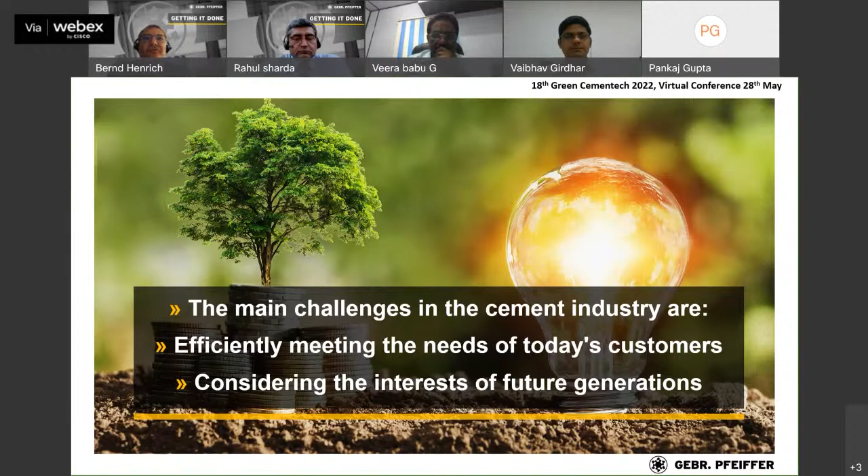It makes sense to look into this in detail. As you know, the efficiency of a plant, the efficiency of the grinding systems, is important, because as known in the literature and from many publications, the power consumption in cement production is

significantly driven by the grinding process. We learned already today and yesterday about net zero clinker production, which means waste heat recovery might be able to get electrical energy for the kiln itself, so to have a zero clinker production. But the energy required in the grinding of the cement raw material, as well as the energy required in the grinding of the cement, is electrical energy which needs to be optimized to pave the way toward low CO2 emission or even net zero CO2 emission. I would like to focus on these grinding processes and how to optimize them.

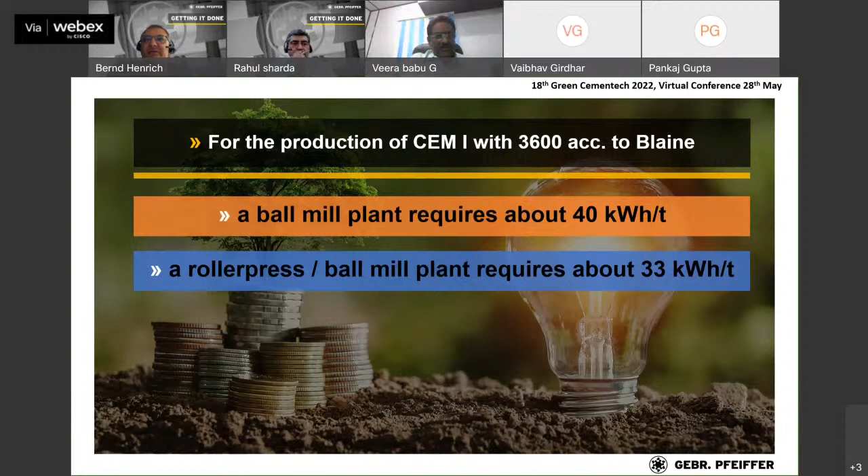Optimization using combi grinding systems, with roller presses in front of the ball mill, gives a significant reduction in electrical energy. The next step is the vertical roller mill, a state-of-the-art efficient grinding system, where we can come down from roughly 40 kilowatt hours per ton to 27 kilowatt hours per ton for OPC cement grinding.

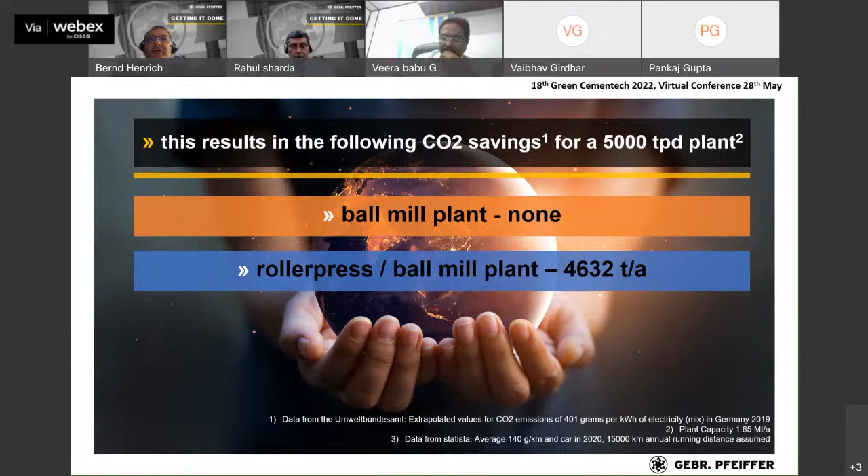And what does it mean in view of CO2 emission? Let's take an example of a 5,000 tons per day plant, which for India would be a small plant, but in the rest of the world is quite a normal size grinding unit. With a ball mill system, logically there is no saving at all. By using combi grinding with roller press and ball mill systems, about 4,600 tons per annum of CO2 could be saved. With the vertical roller mill, that is about 8,600 tons of CO2.

Just to get an impression of what 8,600 tons per annum means, that is roughly equivalent to 4,100 cars, considering a yearly driving range of about 15,000 kilometers, as we are Europeans. So just to see how it works out: when grinding efficiency can be improved, that gives a significant positive effect to the whole environmental situation, not only for the cement industry but also compared to other optimization steps.

So what kind of optimization can Gebrüder Pfeiffer do in this respect? For you, as the cement industry, we are first of all talking about the reduction of the clinker factor. Reduction of the clinker factor is a main step.

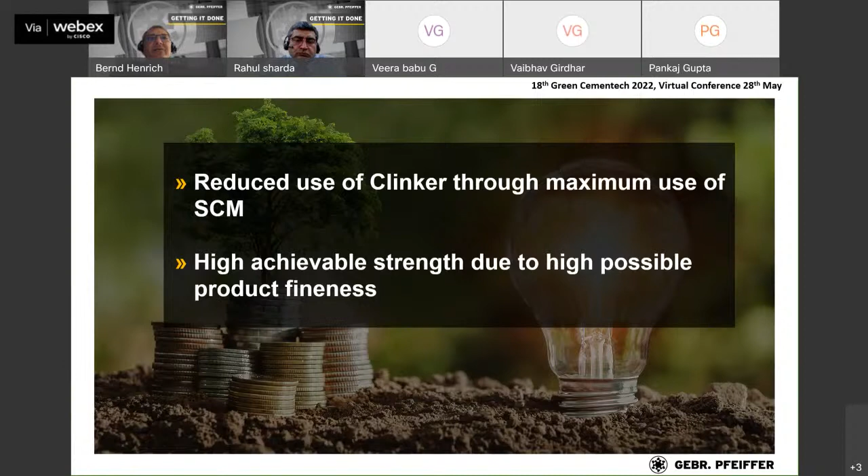What have we done in this view? The improving of pressure loss and optimization of the gas flow is a major step which goes into CO2 reduction, which means in the past 1.5, 2 years, we have newly developed a classifier or optimized further the classifier, the VR and the VC classifier types on the vertical roller mill.

We have made optimization on the nozzle ring, on the gas flow in the lower part of the mill, the gas flow in the classifier, and also the gas flow going to the system, then to the dust collecting system. That all has been done with CFD analysis, and not only CFD gas flow. No, two-phase simulation, powder to be considered in the gas flow.

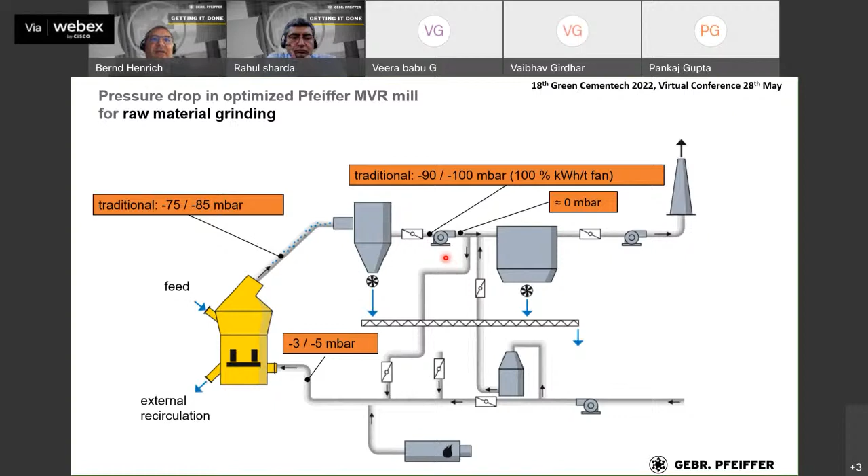And these steps lead to optimization in plants, for example, in raw material, where the traditional vertical roller mill had about a delta P of 75 to 85 millibar, and we had suction pressure at the fan of a raw material grinding system of about 100 millibar. We could improve this significantly. We could reduce by 15 to 25% the power absorption of the fan.

So this goes mainly in the gas flow related issues, and this power saving at the fan gives you about 1.5 to 2 kilowatt hour per ton on the total plant power saving. And this total power saving means saving of cost and saving of CO2 emission finally. So it comes into, let's say, less production cost, and less electrical energy means also less CO2 emission.

And by the way, just coming back to this picture, here you can see an MVR mill for raw material grinding, and you can see the easy and small arrangement. There is a simple steel construction for the feeding of the material. There's no building, so we are not only talking optimization in the operation cost, also the investment cost. With an MVR vertical roller mill, you don't need a building, you don't need an overhead crane.

So investment cost compared when you see a combi grinding system or a roller press building for finish grinding. With our vertical roller mills, you can save a lot of these costs, which are not directly machine costs, but which have to be considered in the total investment view.

That gives you roughly 1 kilowatt hour per ton, 1 unit saving in the cement grinding. Compared to the overall power consumption, it is maybe a small step, but 1 kilowatt hour per ton, again, this is a saving effect. And that means the vertical roller mill grinding systems become even more efficient compared to the combi grinding or the finish grinding in other grinding systems. And it provides you saving of electrical energy, saving of costs, and finally, reducing the CO2 footprint of the complete plant.

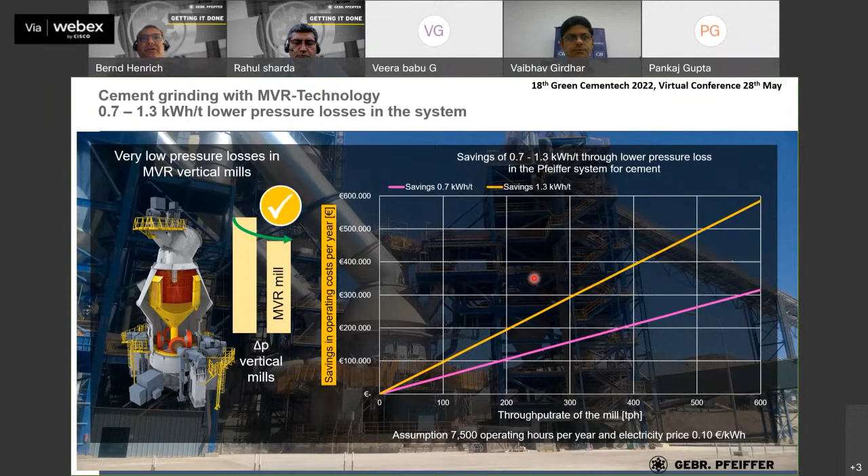Another important point, as Rahul has already explained, use of latest technologies, meaning, for example, Industry 4.0, artificial intelligence. Yes, sure, Gebrüder Pfeiffer is on this way also. We have implemented several testings, and we have a better version using artificial intelligence. An operator knows his plant and his mill, but people are thinking in a certain direction and are driven by the history, the experience.

And if you have 4 or 5 variables, you might change one of them and look for a little bit of influence. The beauty of using artificial intelligence rules is that once we get the freedom to vary the parameters, there could be operation conditions related to the fan flow, related to the speed of the grinding table when you have a variable speed drive, related to the feed rate and things, which nobody has thought about.

And we were able in some pilot installations, for example at a cement producer in Germany, to reduce the specific power consumption by the use of artificial intelligence by more than 15%. And in Sweden, in another plant, we were able to reduce with artificial intelligence the power consumption, but also, what is quite important, optimize the fuel consumption. There in this plant, the beta version was used for the hot gas generator.

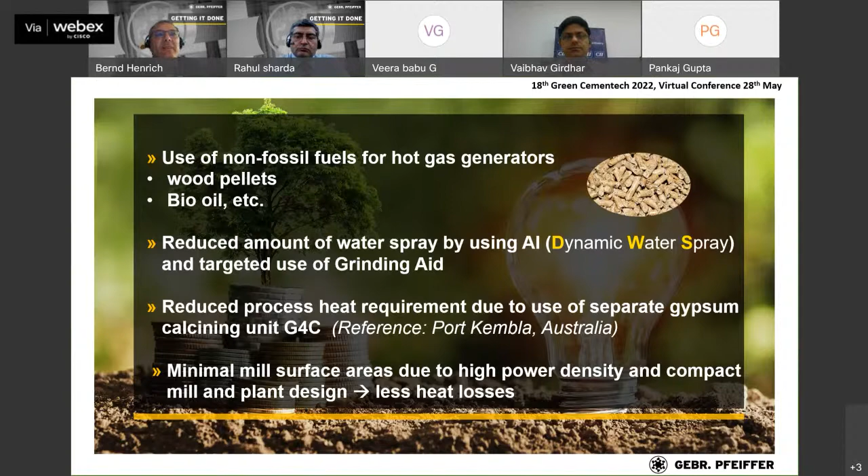Also reducing water injection. The dynamic water spray system is a tool which allows us to overcome the laziness of operators. In the plant, we all know that it's easy to spray some water on a vertical roller mill, whether you require it or not; it's the easiest way to do it from the control room. But there are tools which help us overcome the operator, because he never reduces the water spray later on, and everybody complains about the material quality, the heat requirement, and so on.

So the dynamic water spray system, when it was installed, gave a significant step ahead in reducing the water, because water spray that is not required means increased thermal energy, and that has to be avoided. So there are plenty of steps which allow us as Gebrüder Pfeiffer to improve your operation. We cannot reduce the CO2 emission from the clinker production itself. But we can assist with our systems, with our mills, in optimizing the electrical and thermal energy requirement in the grinding process.

We are also active in the activation of calcined clay. Calcined clay will come up. The reactivity of calcined clay is reported to be even better than that of blast furnace slag. So maybe at a certain time, calcined clay can substitute blast furnace slag as an additive. Calcining means thermal treatment and grinding of the clay. So we have solutions for this.

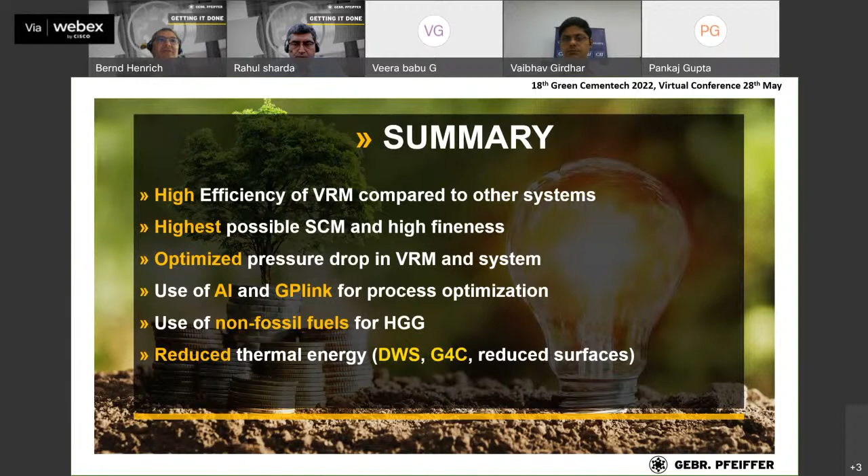Also, we have solutions when we talk about pond ash. Pond ash is stored and is wet, and it has to be transported to the grinding units. So either you transport 20% water on the truck, or you use, for example, Pfeiffer dryers to first reduce the moisture of the pond ash and then have less transportation cost, because in scope 3 CO2 emissions, transportation and so on also has to be looked into. So there are plenty of points where Pfeiffer is prepared to help with optimization. We cannot make cement zero CO2 emitting, but we are on the way to assist you and provide you solutions.

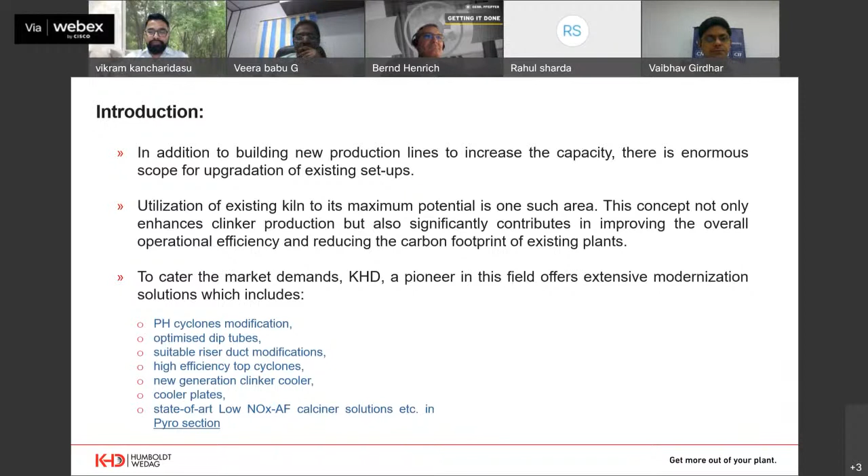And if it's a grate cooler, keeping the existing structure as it is, the complete moving grate can be replaced with the latest grate plates, and state-of-art low NOx alternative fuel calciner, and there are other solutions as well. In grinding, we have the V-separator, static separator replacements for improving the classification, and also the latest generation dynamic separators to improve the productivity and also to reduce the specific power consumption, and also modifications related to ball mill parts and roller press parts in the grinding section we are working on.

Coming to the subject topic here, I'm going to talk about a turnaround study of Kalyanpur Cements, which is the Dalmia Group plant. DCBL, one of the top 5 cement producers in India, has taken over this plant, Kalyanpur Cements, in 2018, and this plant was supplied by KHD in the 80s. And after the takeover, DCBL has approached KHD to do the evaluation for increasing the capacity. So our plant audit team went to the site and did the detailed plant audit to identify the debottlenecking areas.

And we immediately submitted a technical proposal to the customer. And after rounds of discussions, the project has been finalized. And DCBL placed the order on KHD in 2019. And this was a fast track project to execute the complete EP supplies in 7 months.

You see the key data before the modification. The pyroprocess line was operating at 1625 TPD with 42 to 43 millibar pressure drop at preheater outlet, and the temperature for a 5-stage preheater with 370 to 375 degrees. And the raw grinding system, roller press finish mode circuit was there, but of old generation. 120 TPH it was giving at 12% residue on 90 micron.

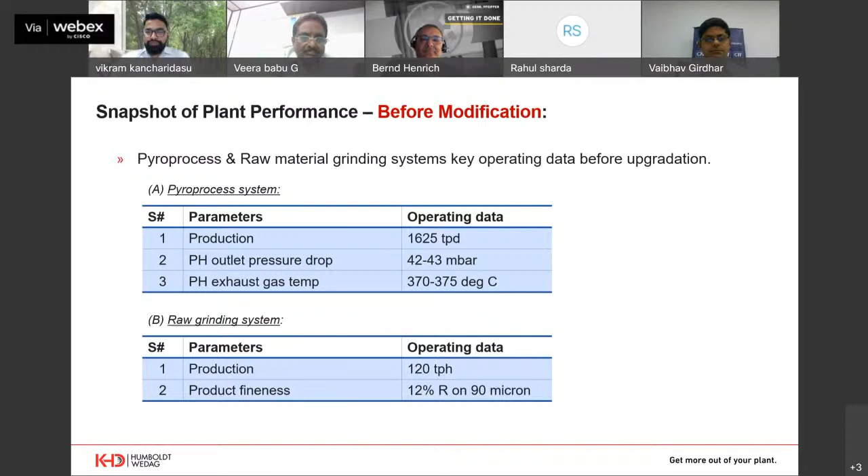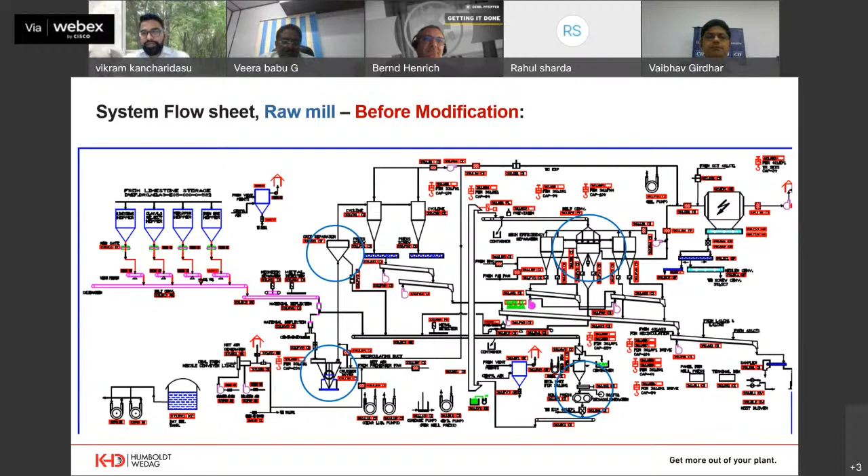And coming to the raw mill section, it is a different circuit from what we are seeing in finish mode in roller press today, because at that time in the 80s there was no V separator. So the drying function was done in a pneumatic hammer mill and also size reduction. From this, the material is lifted to the static separator. From the static separator, the rejects are going to the roller press circuit, and the recirculation material from the roller press circuit going to the dynamic separator, and product collection takes place here and then transported to blending silo. Rejects are back to the roller press circuit. So this is a completely different circuit from what we are seeing today.

Coming to the implementation of the proposed modifications, in the kiln feed section, we have modified the areas and components where the capacity was lower. We have identified what capacity we can guarantee from this kiln and what capacity we can achieve. Based on that, we have estimated the capacity balancing. Through that, we have modified certain equipment, like the extraction gates from the blending silo, the transportation air slides, and also the elevator feeding to the kiln feed bin, and also the kiln feed flow meter system.

In the preheater system, the major modifications include replacement of the earlier generation top stage cyclones with the latest generation twin cyclones of KHD. There are two purposes of replacing this top cyclone. One is to suit the capacity enhancement requirement. The other is to improve the overall collection efficiency of the preheater system, because we were not able to significantly modify the complete cyclones due to building structural layout constraints. But for the top cyclone we had the opportunity, so we replaced it with a better cyclone. We have replaced it with two new cyclones in the top stage, and also an inline calciner.

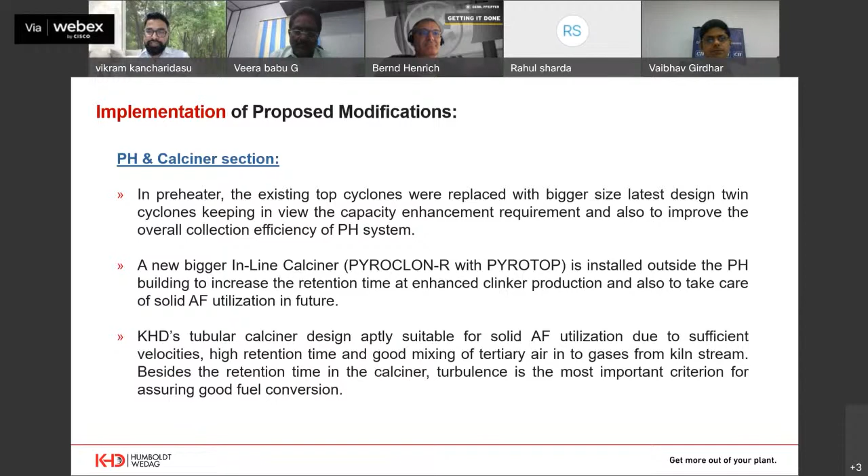Earlier, the plant was operating with a separate line calciner, so we have provided a new inline calciner of bigger diameter completely outside the preheater building. The advantage of this tubular calciner design, as you are already aware, is that it is aptly suitable for solid AF utilization, because the velocities are sufficient for lifting the solid particles. Second, the kiln gases and tertiary air gases mixing takes place in the tubular calciner with the help of the Pyrotop.

This is a unique design in KHD calciners, where we have the Pyrotop on top of the calciner, which takes care of the complete turbulence and mixing effect, because the residual oxygen and the burning particles, meal and fuels, must be mixed well before going into the bottom cyclone. Sometimes we have the residence time, but without turbulence we will not get the required combustion. So with this Pyroclon with Pyrotop design, we have the complete mixing effect, and before reaching the bottom cyclone, we will get complete combustion.

We have also installed a Pyroclon calciner firing system. This is also a patented design of KHD. It's a simple design, but unique, because the meal and fuel are both introduced into the feed box before entering the gas stream. So the pre-mixing already takes place, and the pre-mixed material is uniformly distributed into the gas stream, which gives uniform heat distribution across the calciner.

So it avoids temperature peaks. In old calciner burners, we have seen that the refractory fails too soon because of the high temperature. Because of this uniform heat distribution, this problem will not be there. The other advantage of the Pyrobox is that there is no additional requirement of primary air, which contributes to heat consumption reduction. Apart from this, in the pyro section, we have done some tailor-made modifications, because case to case we have to identify these modifications.

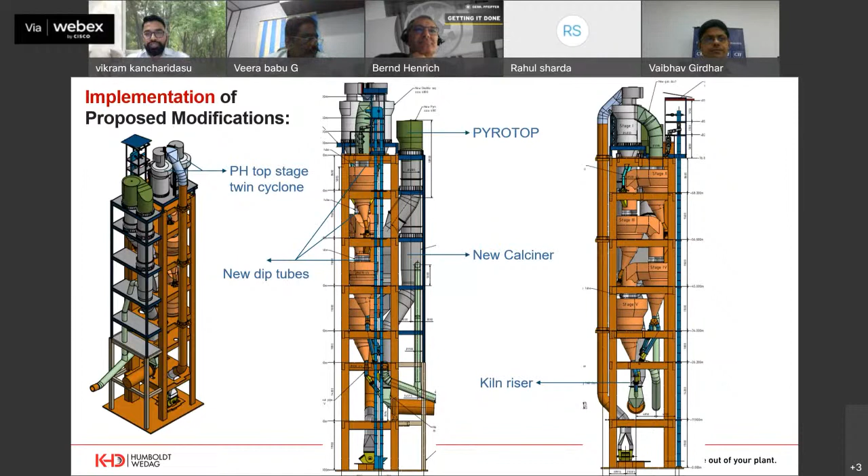and kiln riser section. In the kiln section, we have increased the speed of the kiln from 3.6 to 6 RPM. And the critical components of the kiln for the higher capacity have been checked through the stress matrix analysis. And we found that some of the critical equipment like the kiln shell has to be replaced because it's not suitable. So we have done thorough analysis, given the recommendations, and modified kiln shell of approximately 30 meters.

And coming into the cooler, we have used the outside skeleton and replaced the complete moving grate section of the cooler with the Pyrostep square design latest generation cooler plates. And also to take care of the increased gas volume requirement, baghouse capacity has been enhanced and one new baghouse fan is also installed. Just a schematic flow sheet. You can see the red color pictures here.

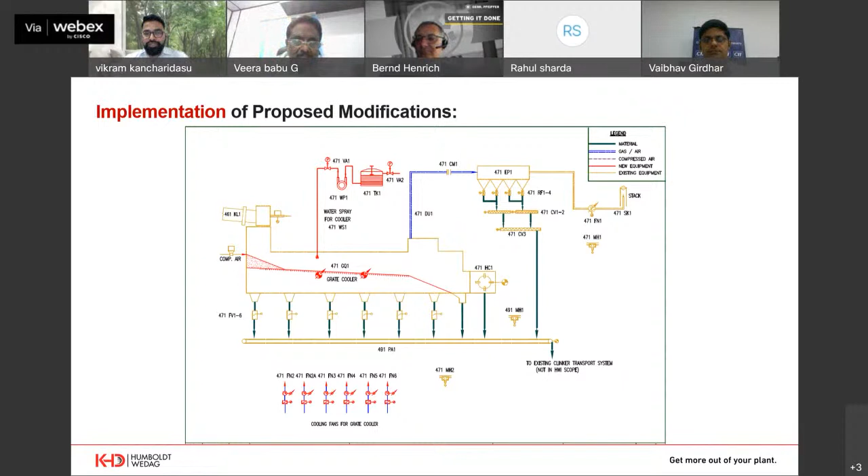The kiln gearbox and motor replaced, partial modification of the kiln hood we have done. And also in this particular case, the existing burner from the group plants has been used with the tip modification, but the swirler blowers were not suitable, so we have replaced the swirler blowers with suitable capacity. In the cooler, as I already explained, the complete moving grate has been replaced, along with a set of new fans, and a water spray system is introduced.

In the fine coal dosing system, the complete existing coal bin has been utilized, and the extraction system has been modified with the Coriolis feeders for both kiln as well as calciner firing. Here you can see in the picture, 2 complete extraction systems are taken independent, one to the kiln burner, the other one to the calciner burner, and both are dedicated, having a transport blower and one common standby blower.

These are the summary of modifications which I have already explained. You can see here the top cyclone replaced with a bigger 4.8 meter dia, and the inline calciner has been installed, suitable for almost 8 seconds retention time. Preheater fan is new, and also in the kiln we have increased the speed to 6 RPM. Motor has been replaced. In the kiln burner only tip modification has been done.

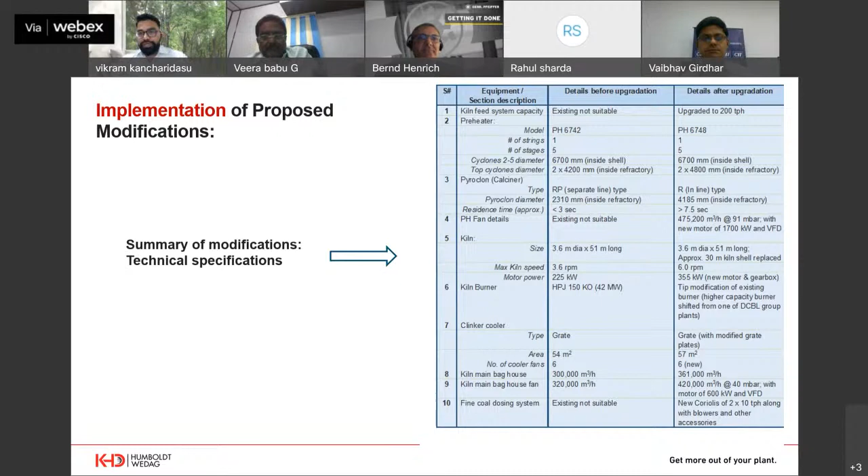In the clinker cooler the complete moving grate has been modified. In the kiln baghouse, the capacity has been enhanced and the kiln baghouse fan is installed. In the fine coal dosing system, new Coriolis of 10 TPH each for kiln burner as well as calciner burner is installed. In the raw grinding section, because on one side we are increasing the capacity of the pyro system, on the other side raw grinding capacity should be suitable for catering that requirement.

So we have seen what are the potentials in the existing roller press system. Being an old design, the speeds were very low, 1.4 meter per second. So we have seen that there is a potential to increase the speed from 1.4 to 1.6 meter per second by changing minor things in the gearbox. So the existing gearbox can be retained. So that we have done. And also the motors were not suitable. Then we have replaced the motors with bigger capacity, 900 kilowatt. RP hydraulics and the roll cock system software, the latest generation, have been upgraded in the existing system.

As I already showed in the flow sheet, the existing system has this pneumatic hammer mill for the drying. Now we have a V separator for the drying purpose as well as for the primary classification purpose. We have installed a V separator, and for the higher capacity, one new dynamic separator is also installed. And these are incorporated in the finish mode circuit with the existing roller press. Two recirculation elevators are installed for V-separator and roller press discharge material handling. And also 2 product collection cyclones and 1 circulating fan are installed.

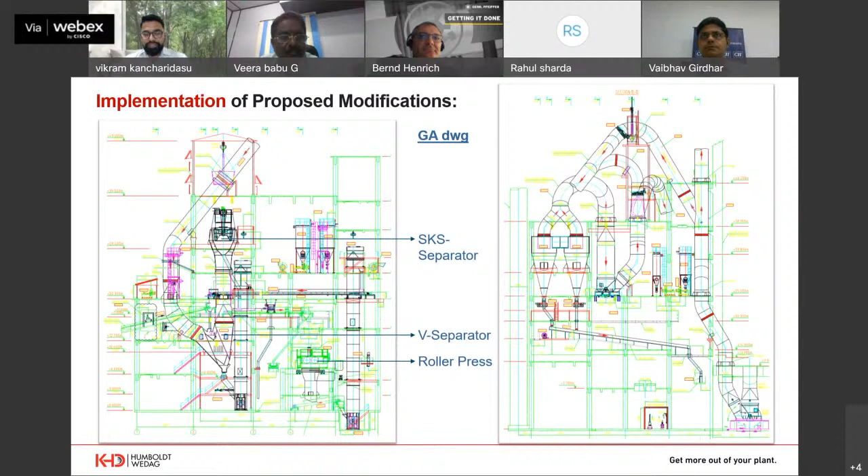So these are the modifications that we have done. Again, the summary: we increased velocity to 1.6 meter per second. Motors are replaced with bigger capacity 900 kilowatt. A new V-separator of this size is installed, and one new dynamic separator has been installed. And the new product collection cyclones of 4.5 meter diameter, two numbers, and one big separator fan is installed.

This is what we have done. And coming to the performance of the pyro process system, we had given certain guarantees during the contract signing time. All those guarantees are achieved.

But when I compare this data with before modification, these results are mind-boggling, seriously, because 1625 TPD has been increased to 2617. The specific power consumption for certain equipment, given in the table below, 17.63 kilowatt hour per ton is reduced to 14.83.

And specific heat consumption, earlier it was operating at 841 kilocal, which is reduced to 738 kilocal. And NOx also, with 1359, is reduced to 792. The point is that without any SNCR system, with this modification, they are able to meet the NOx guarantees.

What is the takeaway from this modification? One is 61% production increase with improved quality, that is one biggest plus for the customer. Second thing is specific heat consumption reduction of more than 100 kilocal per kg clinker.

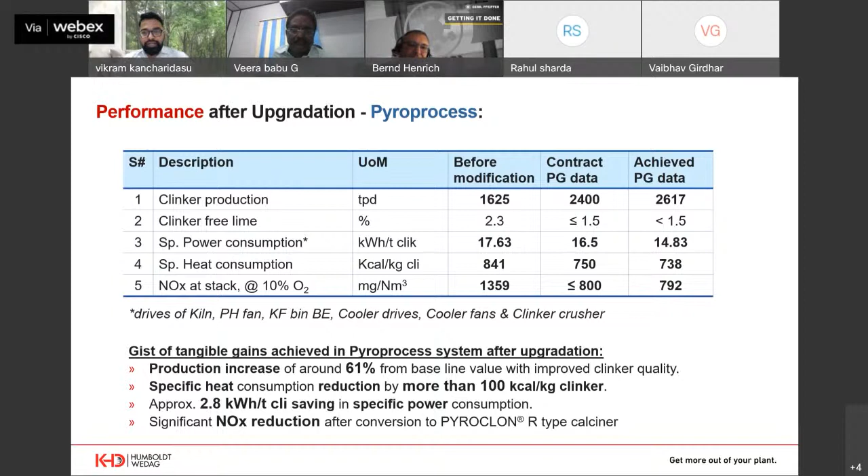Coming to the raw mill system, the contract guarantees are met easily. And if you compare the figures with before modification, against 120 TPH, we have achieved 201.5 TPH.

And in the power consumption also, in finished mode, 13.6 was operating earlier. Now the plant is operating at 12.26 kilowatt hour per ton.

So again, the takeaways in this raw grinding modification: production increased by approximately 68%, and 1.34 kilowatt hour per ton of raw mill saving in specific power consumption.

But the biggest takeaway for the environment is the CO2 reductions. If I calculate the specific power consumption reduction and the specific heat consumption reduction, and the coal that comes down, the overall CO2 reduction per annum accounts to almost 28,000 tons.

So this is the point which, at the beginning of the presentation, I was stating - that there is good potential in existing plants to improve operational efficiency in terms of productivity enhancement, specific power consumption reduction, specific heat consumption reduction. Apart from that, we also can contribute to the environment by bringing down CO2 emissions.

So we proudly say that the mission got accomplished. This is the last slide.

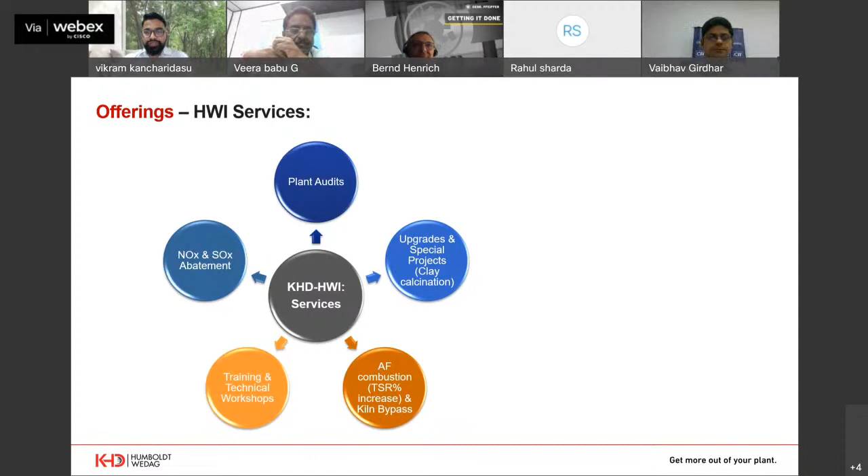Especially the whole of India is now moving towards increasing the TSR percentage. So here we have a variety of technologies for improving the TSR percentage up to 80-85% in the calciner through our pyro rotor latest technology.

And we have also supplied kiln bypass systems. One is already operating, the other one is in execution with the biggest group in India. And we also provided training and technical workshops.

You are already aware, I think KHD has already supplied various NOx abatement solutions and also SOx abatement solutions. Vision of our services division is to provide, whenever we do this type of upgradation solutions, productivity enhancement, second to achieve energy efficiency, and finally provide solutions which are environment friendly. With this, I conclude my presentation.

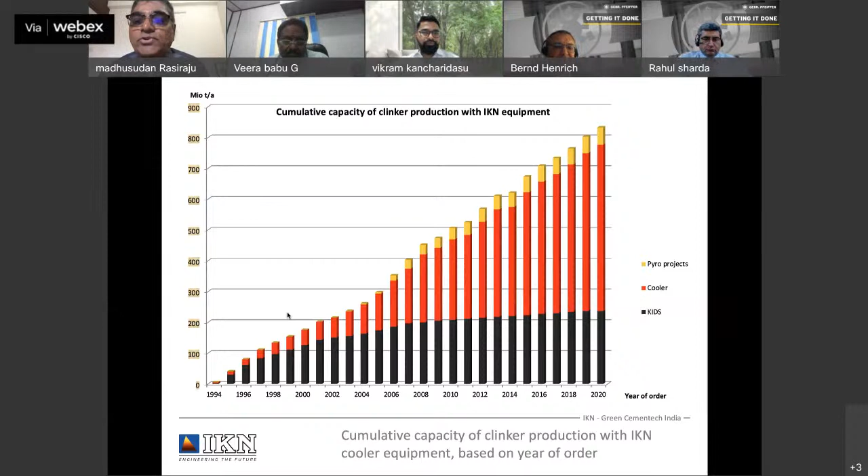This small graph shows the total clinker produced and cooled by IKN coolers. In black, it shows the clinker cooled by KIDS, red shows the clinker cooled by the pendulum cooler, and yellow shows the pyro projects by IKN. We have presence across all 6 continents with 728 projects throughout the globe, and as of today IKN is cooling 1.09 billion tons of clinker per annum.

We started with a humble beginning with a fixed inlet for the coolers, and then the pendulum coolers, almost 360 installed now. And then I would like to come to modernization in the VAC plant.

This is the 2400 TPD dry process cement clinker line in VAC, Hungary, which has been successfully recommissioned and put into production in April 2018. In less than 2 years, IKN completed an enormous task to deliver the project on an EPC basis. The main target of the project was to adapt the pyro line for producing clinker using up to 80% RDF in the calciner.

The 2 lower cyclone stages were replaced, a complete new tower with an inline calciner was erected, and a new bypass system as well as a new static inlet in the clinker cooler were installed. The upgraded kiln line combines the latest industry practices with the most modern and updated process technology.

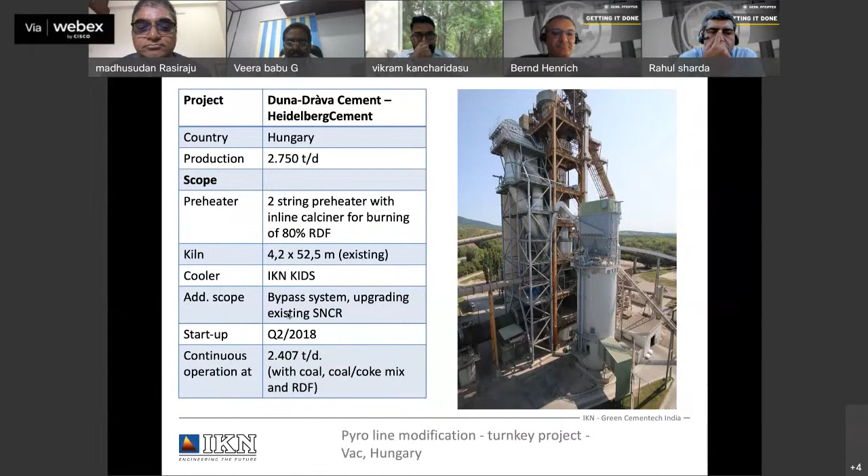You can see here, the bottom 2 cyclones were retrofitted with bigger ones along with new gas ducts, and in the second stage the existing calciner was extended. These are some photos showing the execution ongoing, and this shows how the final preheater tower was retrofitted with IKN technology. This is a short film showing the activities in this plant.

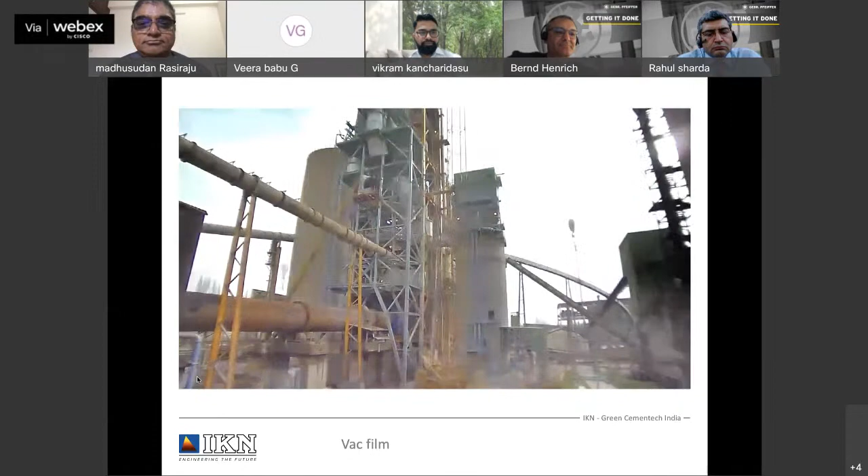So what we do is, as a precondition, we do CFD modeling for all our preheater projects, because basically the preheater is nothing but airflow techniques. You need to know how the air is introduced and how it is directed into different systems.

Another modernization plant we did was the Burglengenfeld plant in Germany, a Heidelberg plant. IKN was awarded a contract for engineering, supply, and installation to upgrade the pyro line to 4,000 tons per day. They had 2 lines, one at 2,000 tons per day and another at 2,000 TPD. One line was completely scrapped, and one line was upgraded to 4,000 tons per day. So from raw meal feeding to clinker discharge, the contract included integration engineering, supply, and installation of add-on components of the raw meal grinding plant, etc.

The upgraded kiln features state-of-the-art technology in order to reach the targeted production level and comply with future emission limits. The new production line comprises a 2-string, 5-stage preheater with inline calciner and Firebird Combustion for coarse RDF. IKN's most modern preheater and calciner design ensures minimum pressure drop at maximum performance and high efficiency. The kiln line was put into operation with various alternative fuels. This is the overview of the Burglengenfeld plant.

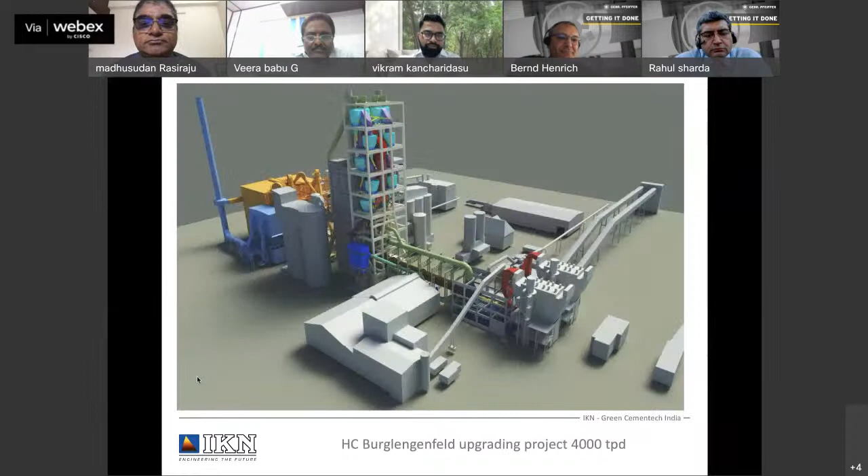This is the overall view of the preheater tower with FBC. FBC stands for Firebird Combustion, which is the IKN patented product used to fire various alternative fuels.

So this is the overall scenario of the Burglengenfeld plant, and this is the completely preheater tower covered with cladding.

And a new line at Märker Cement Plant. This is the third project which IKN did the pyro modification for in this plant, at the beginning of 2020. IKN was awarded a contract from Märker Group comprising the engineering, supply and installation of the 3000 TPD pyro line from raw meal feeding to clinker transport. By upgrading this cement plant at Harburg, Germany, Märker leads the company towards a sustainable future.

The plant will feature state-of-the-art technology in order to increase production reliability and reduce emission norms. This is a single-string preheater with inline calciner, and FBC was introduced, with a 3-pier kiln and IKN Pendulum Cooler with roll crusher and bypass system. Raw meal feeding, burner, filter, and clinker transport were also included in our scope.

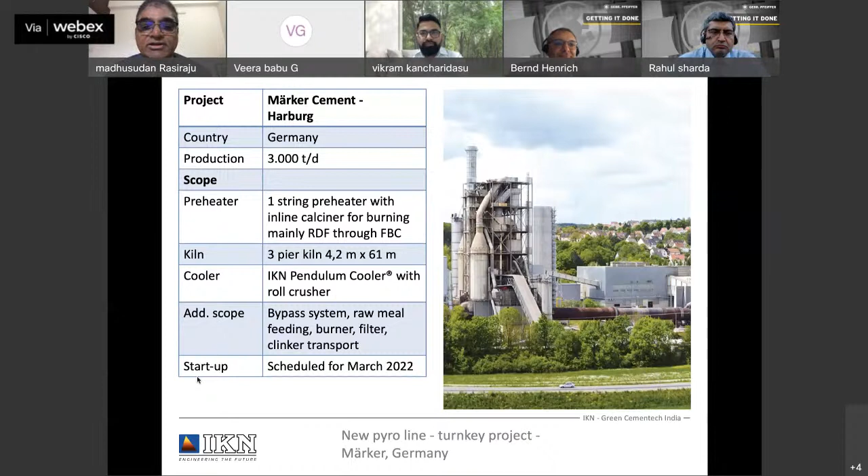So this is the overall view of the plant. It has raw meal feeding, then the preheater, a 5-stage preheater. Cyclones are 7.7 meters, with a steel construction preheater tower 110 meters in height, and FBC, 2 elevators, a dust transport system, ID fan, etc. This is the overall view of the logistics of the cement plant at Märker.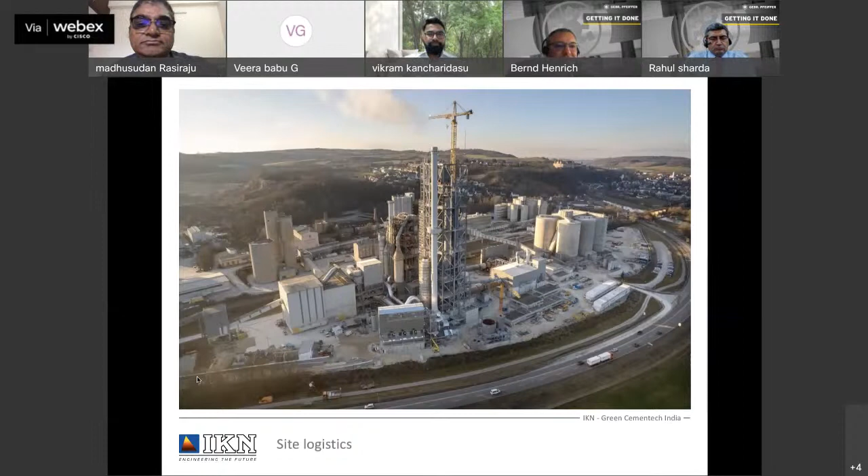And the preheater erection was going on. This was a huge task for IKN, to lift the kilns in a fully assembled condition. Cranes of almost 190 tons, and a second crane of 120 tons, were deployed to install this kiln in a very short time. And the kiln is ready to receive the clinker.

We did this with the total team in Germany, the contractors, and people from various countries, and it was a successful project for IKN.

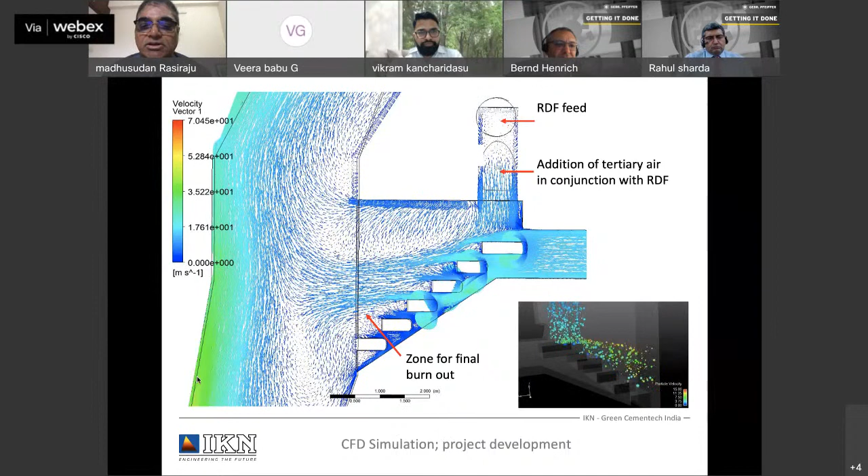So now coming back to alternative fuels. This is a very interesting development at IKN, called Firebird Combustion. This Firebird Combustion can be used in conjunction with the pre-calciner, and it is a static equipment. There are no rotating elements inside.

This is a completely refractory-lined equipment, and hot air from the tertiary air duct is introduced here, while alternative fuel feeding comes from the top. These are all heat sinks, and they can be adjustable. The material coming inside the FBC will have smaller particles fly away into the calciner for complete burning, while heavier particles settle on the heat sink and burn there, getting better residence time.

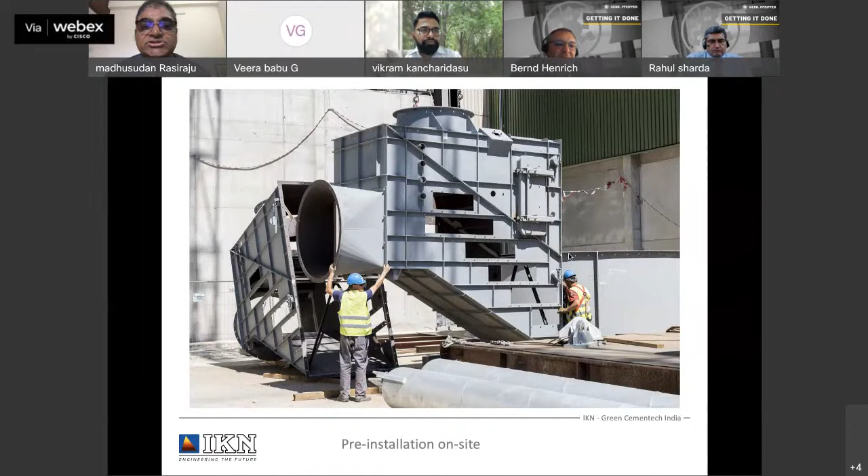And this is the equipment in action, shown here during pre-installation on site, and this is the inside view.

So this is the FBC location, and the tertiary air duct is taken as a small branch and introduced into this one, and this is connected to the calciner part of it. So this completes the preheater side.

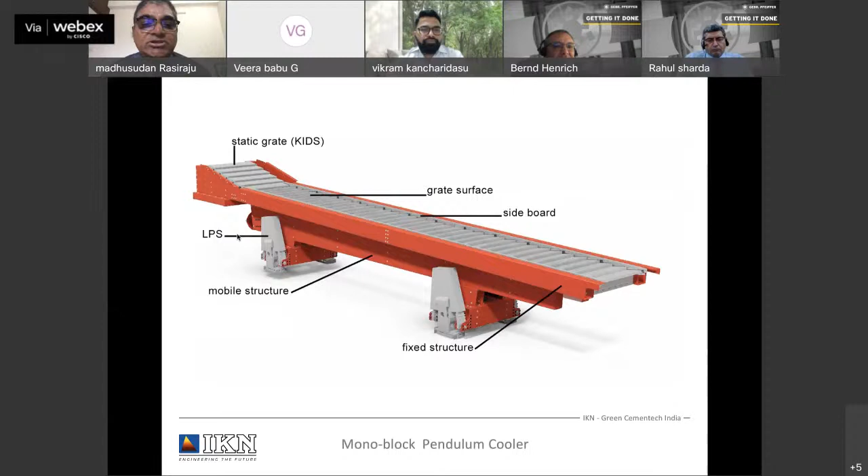Now I'm getting into the pendulum cooler. Already I think my colleague yesterday explained, and I don't take much time on the cooler. So I quickly run through the system. And the monoblock pendulum cooler, you all know that IKN pendulum cooler is the best in the industry today. And you can see this is the old IKN Coanda blades. And then the new IKN Coanda blades are redesigned so that it'll have a direct flow and a uniform distribution of air and less pressure drop.

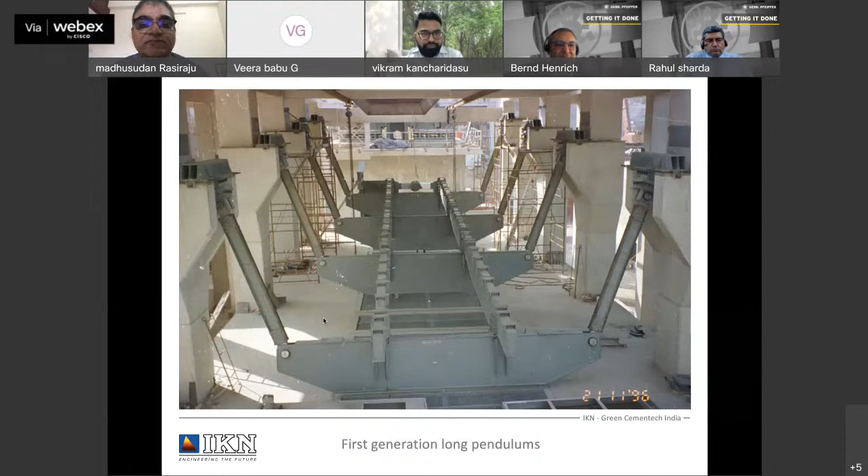And this is how it looks like, the new Coanda wing blade. And this is Coanda wing blades assembled in the pendulum grate boxes. And if you see, our first generation IKN cooler is having the pendulum suspended on the sides of the casings, and this is no longer used, and we keep updating our technology generation after generation. And today we are nth generation, and this is the pendulum, how it looks like.

Today's very compact equipment, and we call it a linear pendulum suspension because the motion at the pendulum is converted into linear motion on the top, so that there is no arc motion, so gaps are controlled very much.

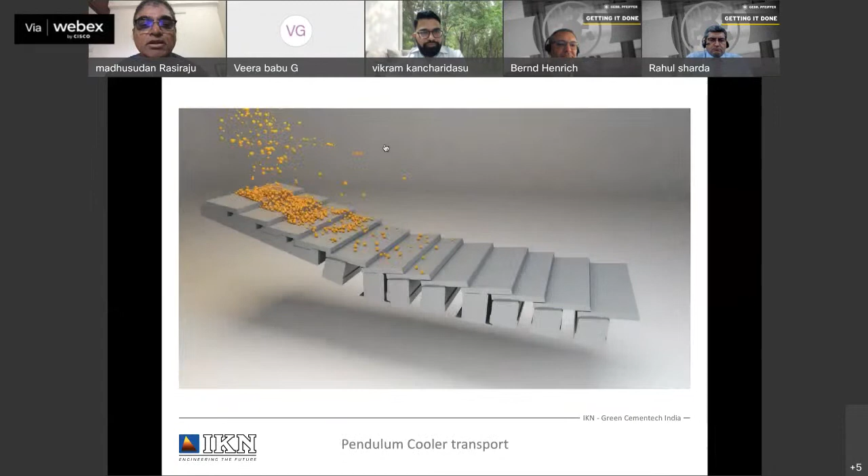And if you see here, the clinker simulation we have shown, on the fixed inlet clinker comes in here, and then when it comes to the movable section, the clinker bed is slowly received and then transported forward without any disturbance to the bed. That is a more important factor in the clinker cooler. We should not disturb the bed. The bed can be disturbed either by air or by the conveying elements. But in our case, the bed is not disturbed.

And for every 2 stationary rows, we have 1 mobile row. And then as the sinking phenomena of the mobile frame is arrested, the gap between the mobile and stationary will remain for a longer period of time in case of IKN cooler. And that is one of the major benefits our customers are getting, that efficiency will not deteriorate over the period of time.

And roll crusher, you all know, it is either kept at the intermediate position or at the end position, depending upon the capacity of the plant and the requirement of the customer. And then we have a TDE, it's called a dust removal system. And normally what happens is the 4th generation cooler or walking floor coolers claim that there is no spillage, but we have found that the spillage is being removed from the undergrate compartment in a very hot way.

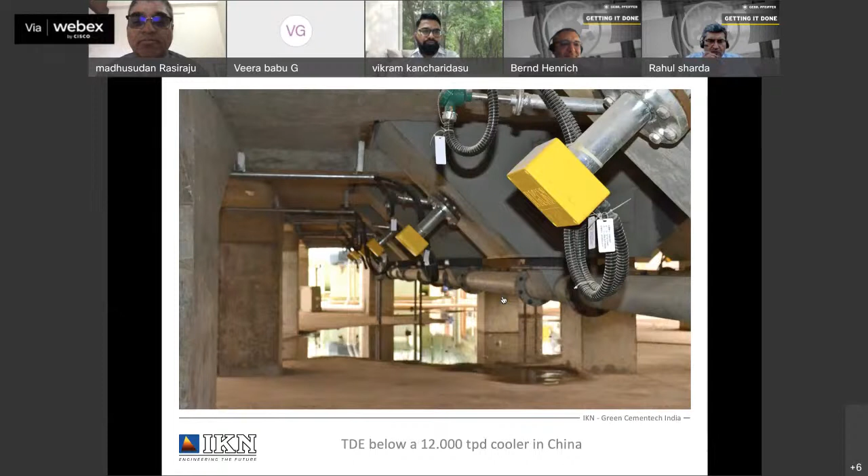Whereas in our case, this is removed by means of TDE, it's called tube dust extractor, which looks like a very simple conveyor of about 4.5 inches diameter. And inside the tube, there are discs connected by the chain. And this conveyor need not run 24 hours a day. Normally in a cooler, it works between 40 to 80 minutes in a shift. So whatever dust is accumulated inside the undergrate compartment will be taken out by this tube conveyor in IKN coolers.

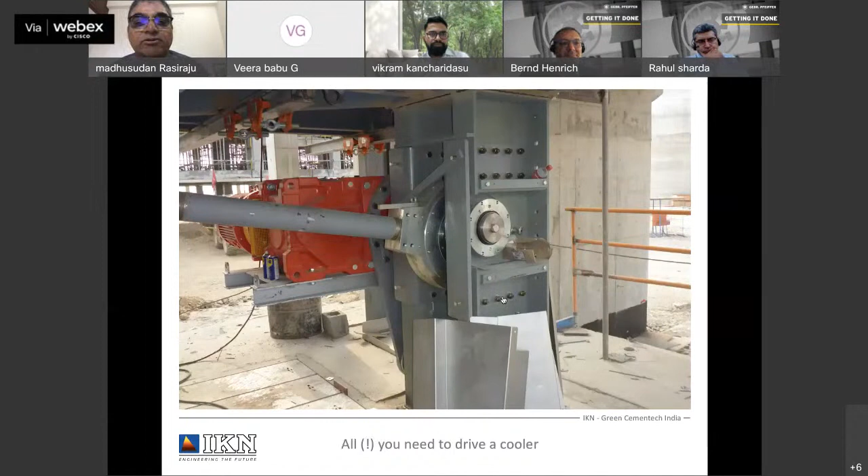And another innovation IKN did is DLD drives. You know, we are the first people to come from mechanical to hydraulic, and we are the first people to come from hydraulics to mechanical now. And now since technology has developed, we are able to simulate the similar kind of motion, that is slow forward and quick backward motion, by using VFD technology and gearboxes. So this is a single drive cooler, and similarly we have a twin drive where the capacity goes beyond 5,000 tons. We operate with 2 linear dynamic drives.

So this has got advantages because you don't need to have a hydraulic room and clumsy hydraulic pipes, and there is no need of heavy maintenance in terms of hydraulic drive system. So the maintenance is very less in case of DLD. So these are the references of DLD drives since 2014 till today. And almost 86% of current coolers we have been supplying with the DLD drives.

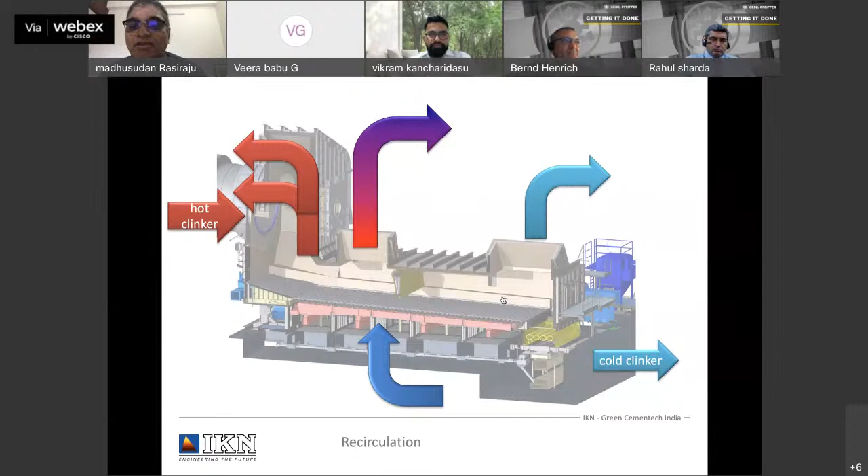And another challenge we faced is the cooler recirculation system. So what happens when the industry started demanding high WHR power from the cooler? So we had a challenge. The high efficient cooler will automatically have less heat in the vent. So with the less heat, we will not be able to generate the power which conventional or low efficient coolers will generate. So what IKN did was, we have taken mid-air or hot air from the vent and recirculated it back into the cooler undergrate chambers. And by doing that, we could enhance the WHR power considerably.

So we are able to give higher recuperation efficiency to the cooler, and at the same time give the maximum possible WHR without compromising the recuperation efficiency. Because firing less coal is more advantageous rather than buying the coal and then producing 20% less efficiency in WHR systems. So these are all the wide references we have throughout the world on WHR recirculation systems.

So I did the complete analysis of IKN cooler with the preheater and kiln. And IKN is not only a cooler supplier, but we can supply the preheater or kiln cooler to meet the present norms to have reduced NOx, SOx, and particulate emission with our new technology with the FBC and all that.

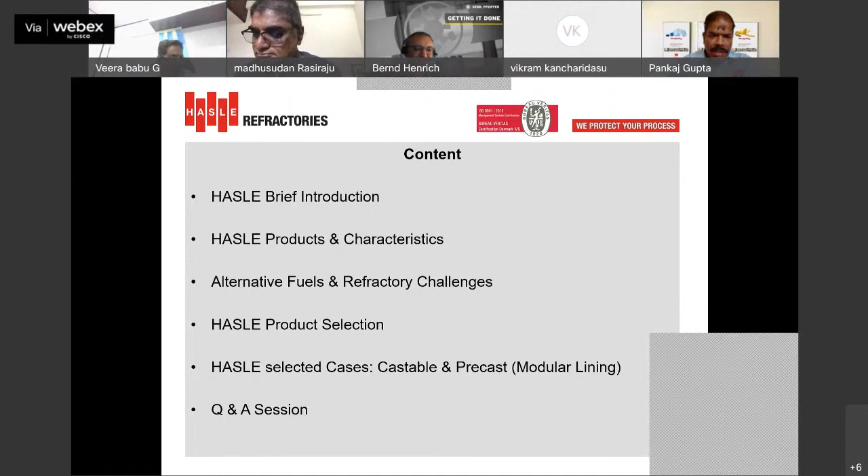So what are these alternative fuels, how they can help in reducing carbon footprint, and also how they affect the process of cement and refractory performance. So I will try to give my views on the same. I'm Pankaj Gupta, working as business head in HASLE Refractories and looking after HASLE business in India, Middle East, and East Africa. So the topic of my presentation is minimize refractory challenges when using alternative fuel. In my presentation, I will cover a brief HASLE introduction, HASLE products and characteristics, alternative fuels and refractory challenges, then HASLE product selection and some selected cases.

So brief introduction, HASLE is a privately owned company established way back in 1843. We develop, produce and sell refractory material. Head office, research and development and production is in Denmark. Subsidiaries in India, Thailand, and a European sales office in Copenhagen. Worldwide, we are selling in more than 50 countries. Main products are aluminum silicate castable and precast for cement, steel, and power industry, and also some other high temperature process industries. Annual capacity of the Denmark factory is 20,000 tons of low cement castable, and also 1,000 tons of precast annually.

From our headquarters, we provide engineering, consulting, and designing of refractory lining. All the required testing is done in our own laboratory, where we carry out various tests to measure and secure material performance as per specific customer process requirements. We provide technical supervision for installation of all products, carried out by highly skilled supervisors from HASLE or from our trained partners. So coming to the products, there are a variety of products. Mainly we are producing dense castables and precast. In castables, we are covering traditional castable, gunning castable, low cement castable, and no cement castable.

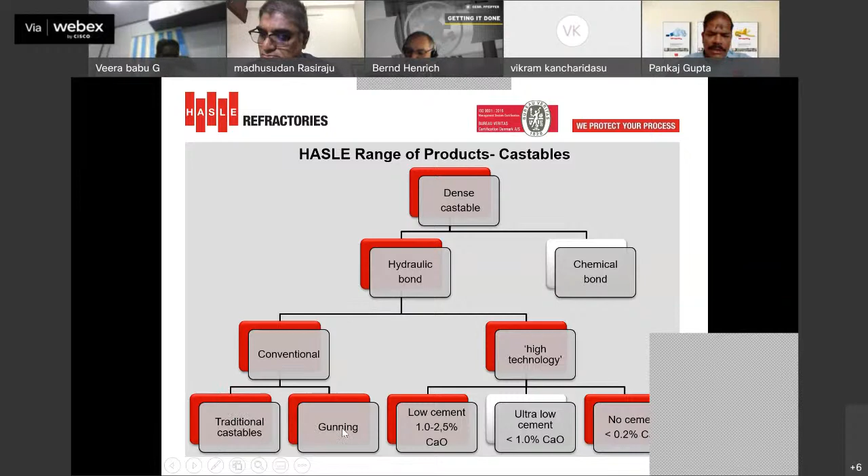So coming to the alternative fuels, why this came into the picture? As we all know, there is a limited amount of conventional fuel available in the globe. So there is scarcity of the conventional fuel, so there must be some alternate for that. That's why this word came, alternative fuel.

And also the high cost of conventional fuel. Like Veera Babu sir already told, the cost of coal and petroleum has increased a lot. We have seen a 2 to 3 times jump in the prices of coal. At the same time, these alternative fuels provide a high calorific value compared to fossil or conventional fuel. One more thing is that they emit a lesser amount of CO2 and greenhouse gases.

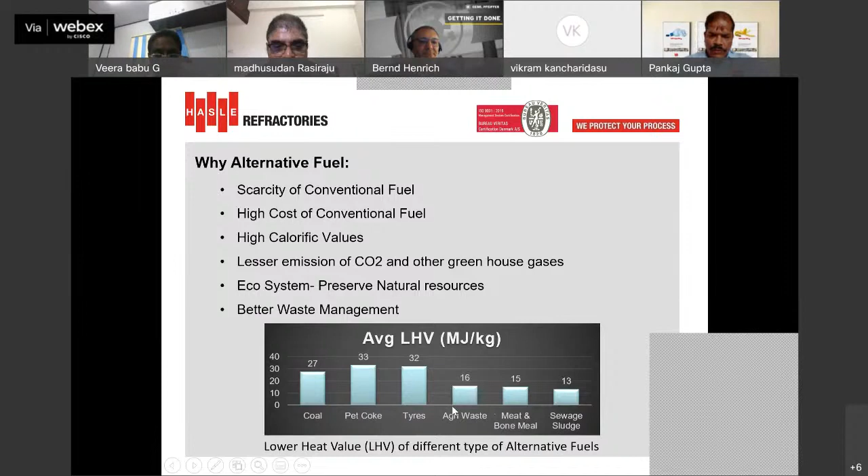So there are different types of alternative fuels like petcoke, biomass, agricultural waste, municipal solid waste, pharmaceutical waste, rejected tires, non-hazardous industrial wastes, plastic waste, and waste oils from the industry. So there are many types of industrial alternative fuels available.

So how do these alternative fuels affect the process and also challenge the refractory performance? As we know, different types of alternative fuels are available, and they have different natures of burning. So they provide different grades of heat during burning. In the process, when a plant is using alternative fuel, there is poor distribution of heat, unstable precalciner operation, and dusty kilns.

During the combustion of these alternative fuels, they form a lot of acids and produce a high amount of volatile gases like alkalis, sulfates, and chlorides. It is a fact that when a plant uses municipal solid waste, it introduces more ash and high content of alkalis and chloride in the system. If you are using pet coke, it introduces more sulfur. If you are using pharmaceutical waste, it introduces more chloride. So different types of alternative fuel introduce different chemicals or acids into the system.

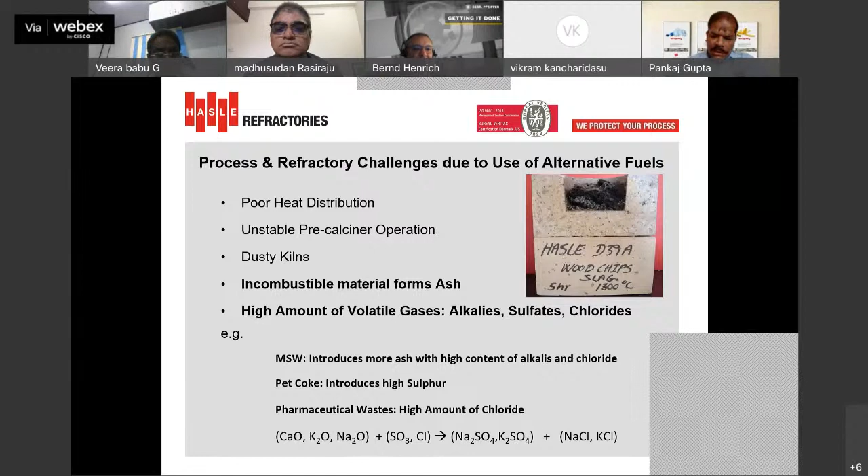In the same way, sulfates react with the different alkalis, and when they react with the refractories, they cause brittleness, and the refractory becomes very weak and fails early. Then chlorides have a tendency to infiltrate very easily into the refractory lining and condense in the refractory. When alkalis come, they react with it and form vapor, which makes the refractory not perform.

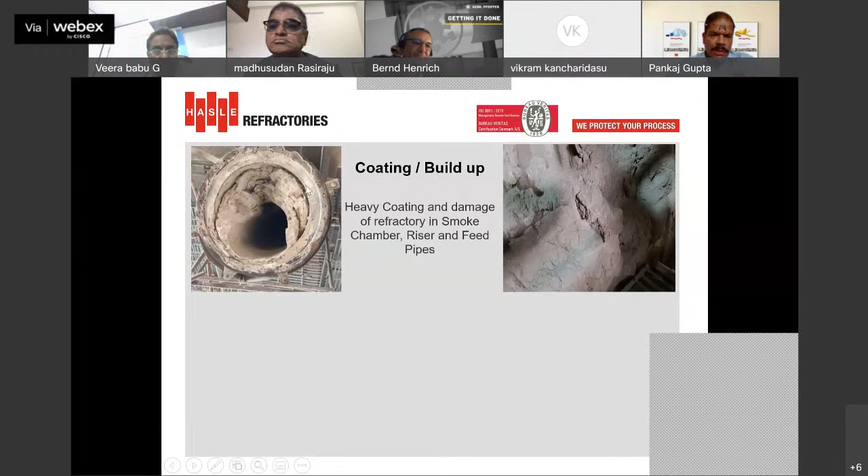Along with these chemical attacks, they also form a lot of acids which cause build-up and coating, especially in the preheater area, more specifically in the riser area, feed pipes, and smoke chamber area. Here are a few pictures. This picture of the feed pipe is from site, and you can see this feed pipe is around 60-70% filled with coating, restricting the flow of raw material. And here is the picture from the riser where these acids stick to the refractory, and once this coating will be removed.

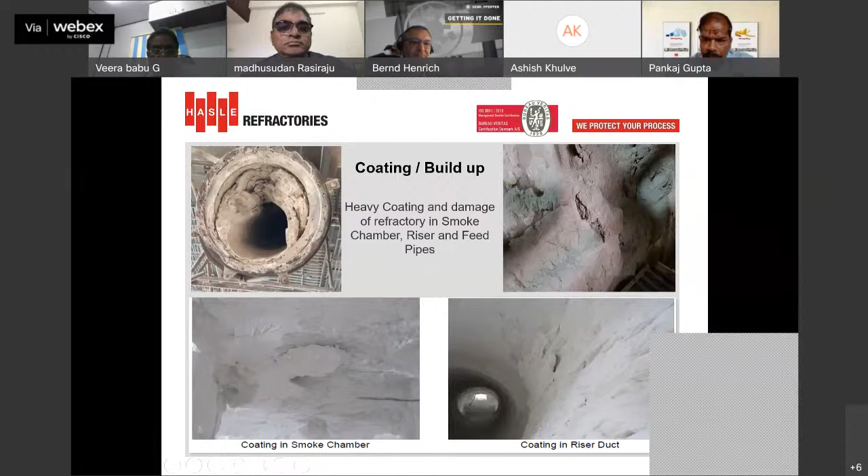Yes, sir. Sorry to interrupt you, but we are not able to see your slides. Sorry. Sorry to interrupt you, but we are not able to see your slide. Sir, slides are visible, sir. We can see. Can you kindly check from your end, sir? Yes, sir. Slides are visible.

Mr. Pankaj, please go ahead. Yes, okay, sir, slides are visible.

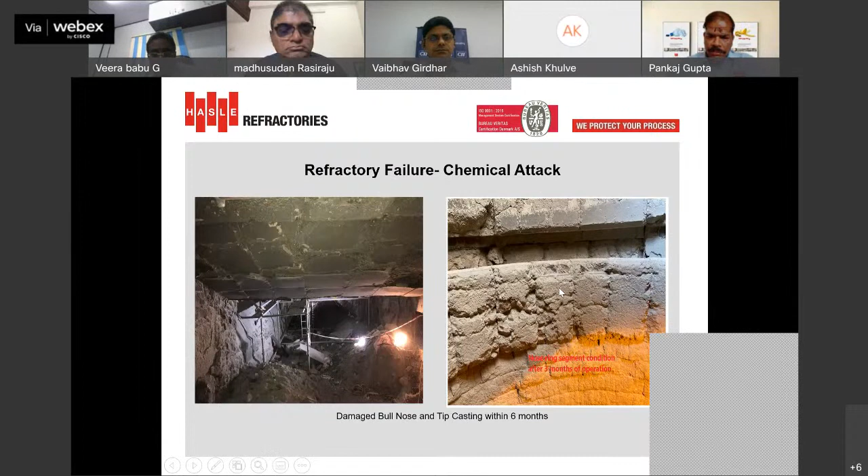So the same way, if your refractory is not capable enough to take care of these alkalis, sulfates, and chlorides, it will fail prematurely. You can see the picture of this bull nose, and also here a picture from tip casting. So this is the need: when you are going to use alternative fuels, you have to upgrade the refractory, otherwise it will disturb the flow of material due to more coating formation.

Frequent cleaning of coating will be required. For that you need more manpower to clean it, or more air blasters will be required, and more electricity to operate them. Shorter life of refractory will be observed. Intermediate breakdowns to repair the failed refractories. There will be loss of heat, energy, and other resources like manpower and material to repair the damaged refractory.

So to operate the plant for a whole year, more and more refractory will be required over a period of time. So upgradation of refractory is the need of the hour to cope with the above issues and use more and more alternative fuels.

So actually HASLE produces refractory for most of the critical and non-critical areas of the cement plant, whether it's a burner pipe, tip casting, bull nose, cyclones, smoke chamber area or cooler parts. We have a very unique refractory solution that is universally known as modular lining.

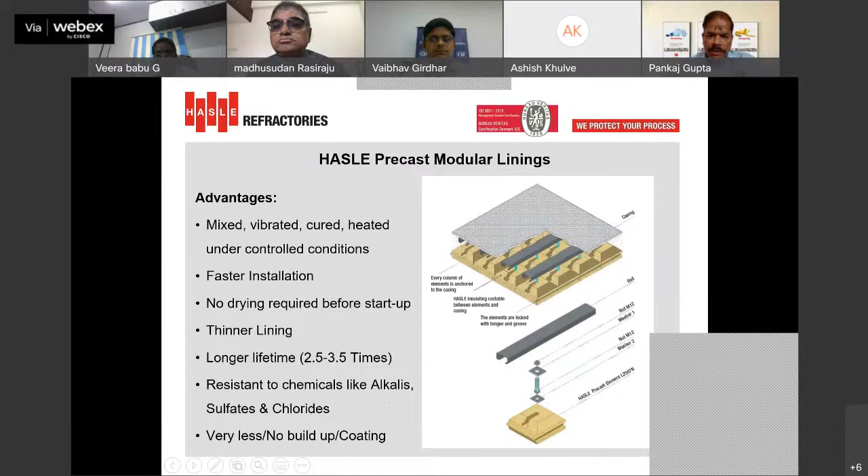Its main advantages are that it is mixed, vibrated, cured, and heated under controlled conditions in our factory. It can be installed faster than low cement castable. It doesn't require any drying because it is already preheated. Thinner lining is possible. A longer lifetime can be achieved, around 2.5 to 3.5, sometimes 4 times. We have observed it is resistant to chemical attacks from alkali, sulfate, and chloride, so very little or no buildup has been observed on the refractory surface.

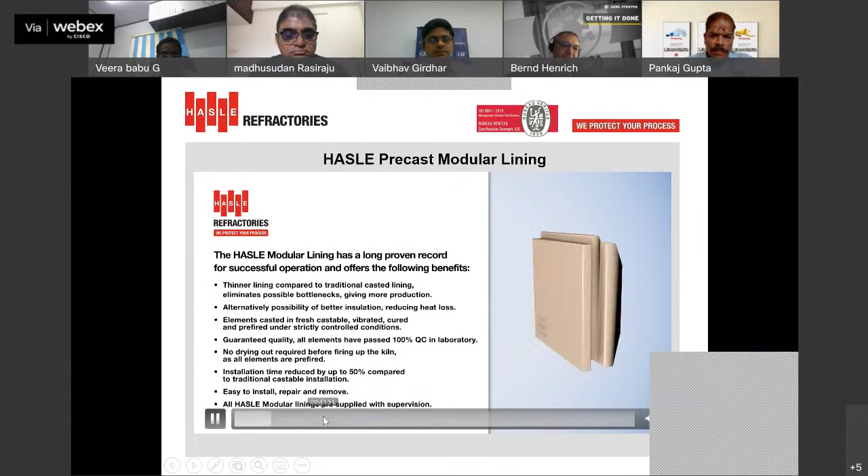I just want to show one small picture regarding the installation of this precast. So this is the precast. Its size is around 250 by 250, and its weight is around 15 to 16 kg, so it's very easy to handle during installation. Here's a typical installation in the smoke chamber area.

First, these steel plates will be welded to the mother shell, and these base elements will be fixed using proper expansion provision, and then these blocks will be held using L anchors welded to the mother shell. It goes the same way. Then these channels will be welded on the mother shell, and using this washer and bolt arrangement, they will be fixed to the main elements.

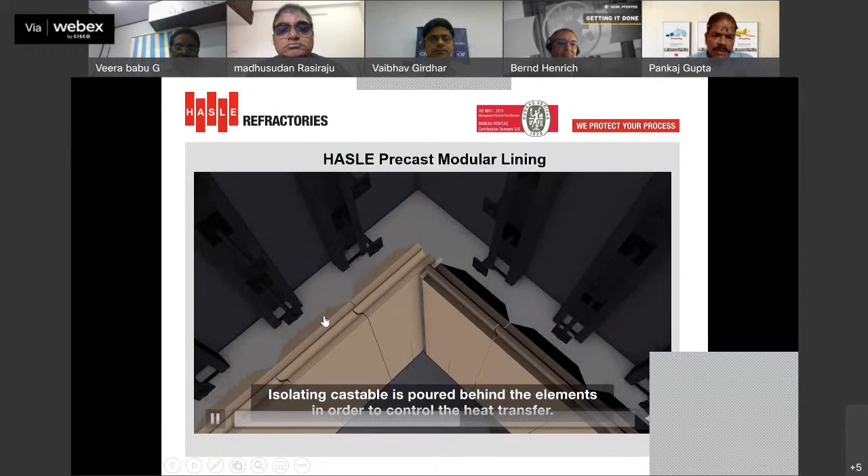So this goes on, and the gap between the wall and the precast elements will be filled with insulating castable and insulating blocks. So there will be 2-layer insulation behind the main precast. This goes on. This is the completed precast smoke chamber.

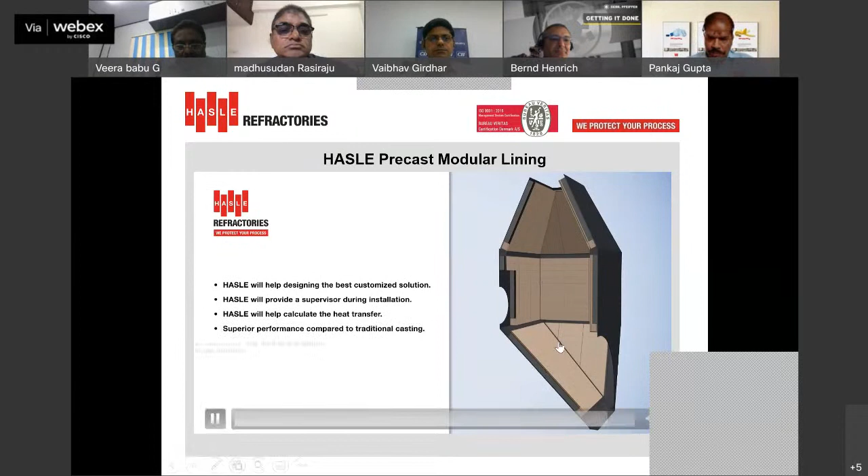One more thing I would like to highlight. We have seen castables have a certain shelf life, like 6 months or 9 months, but these precasts have no specific shelf life. They can be kept at site for 5 years, 10 years. They have no shelf life actually. So these are some selected differences for precast.

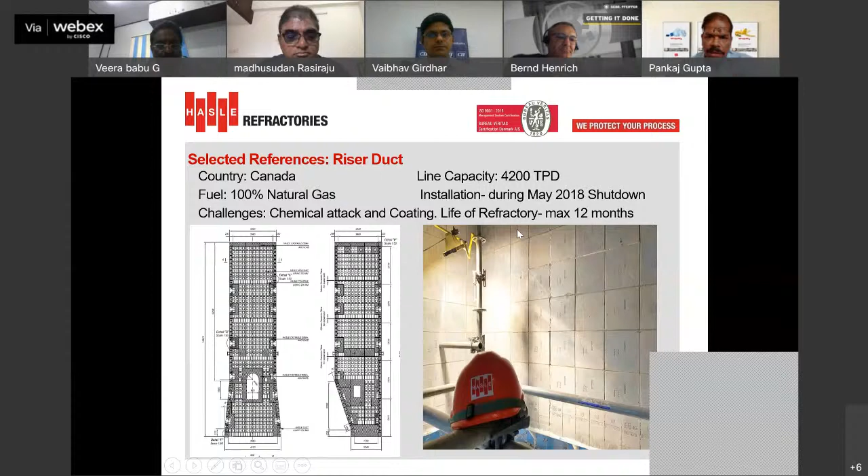The whole riser was replaced with the precast lining, and now it has already crossed 3 years. This is a picture after 3 years, and still it is very intact, and we are still expecting 2 more years life with this lining.

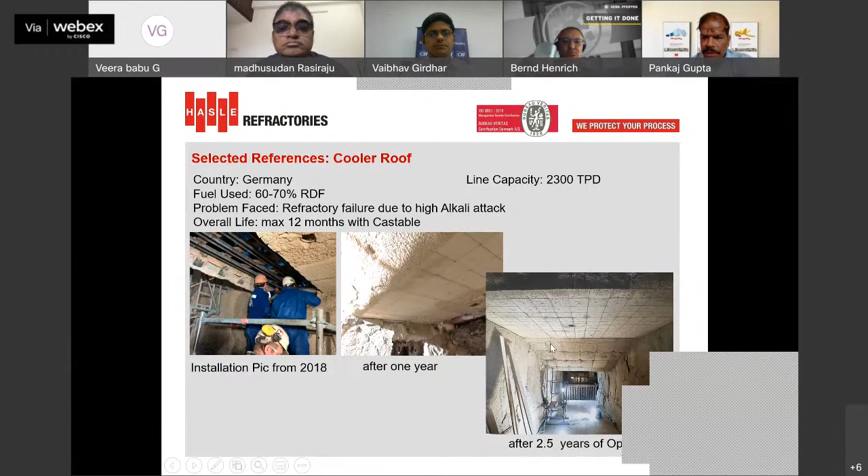So this is the plant from Germany, which is using 60 to 70% RDF, and they are facing a lot of patching work. They are doing patchwork every year in their cooler area. So in 2018, they replaced it with HASLE modular lining, and you can see the picture after 2.5 years. It is still in a very good condition. It looks like a new one.

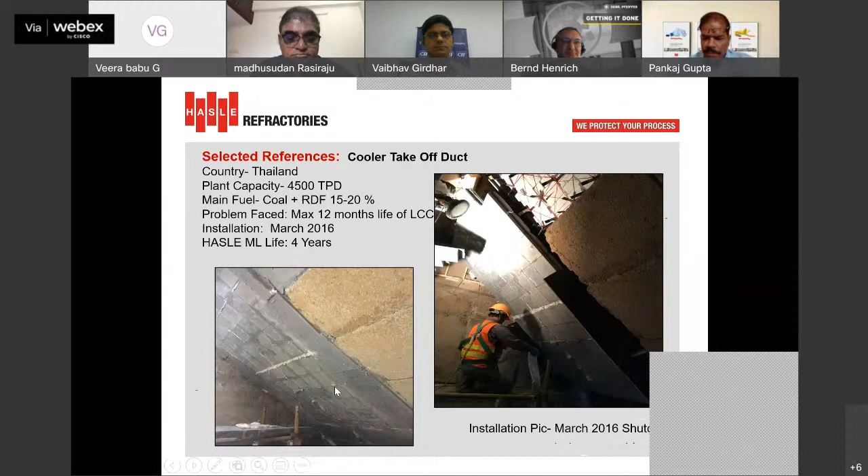And depending on the plant problem, like we have seen many plants are facing a high coating issue in their meal pipes. So HASLE developed this precast for the feed pipe also, where it can be installed very easily, and installation time is also very fast. 10 meters of feed pipe precast can be done in a single day.

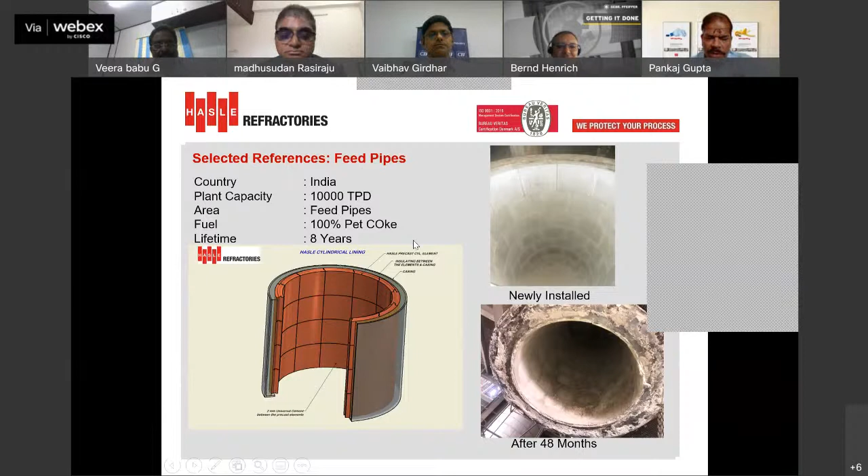And you can see the condition after 4 years. It was just taken a few days back from the site. There are no traces of coating found in the feed pipe. This plant is using 100% pet coke, and in other feed pipes where castable is installed, we can find lots of coating deposited on the feed pipe castable. And also life-wise, it provides 8 to 10 years life. We have already witnessed that.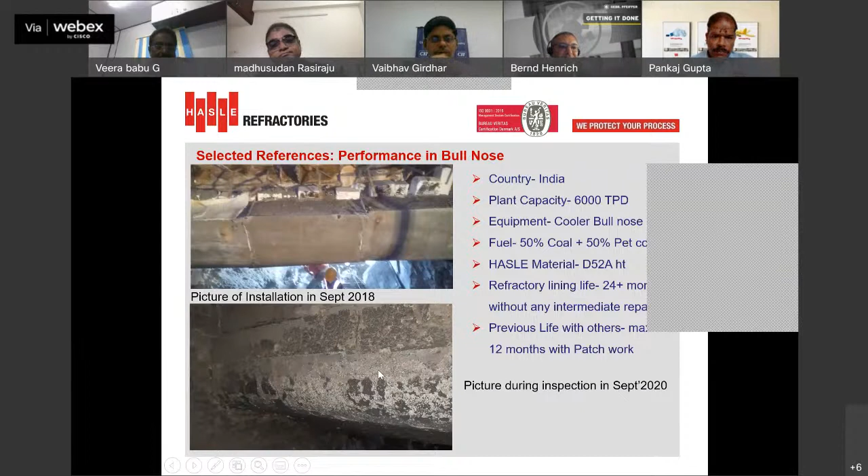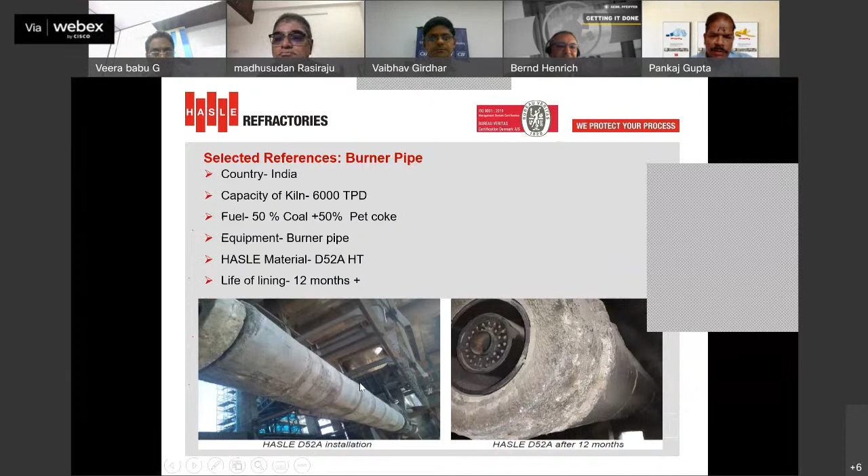This is the same plant where we also installed D52A castable in their tip casting area, and they achieved 18 months life in this tip casting area. Earlier, they used to get only 8 to 10 months life.

By using good quality refractory, cement plants can make their process smooth and stable. A smooth, stable production means being more energy efficient. Longer lifetime of refractory means less consumption and less installation man hours, which over time reduces the CO2 footprint and maintenance cost. High grade refractories also support cement plants to use more alternative fuel in their process.

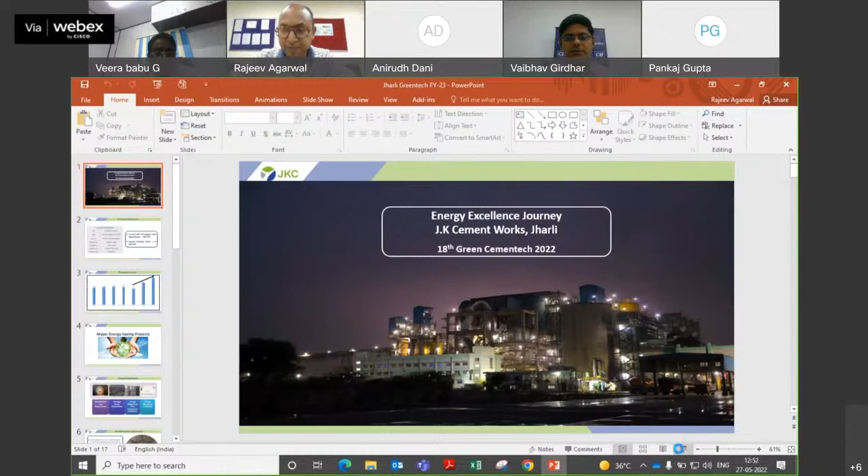You are on mute, Mr. Raju. Mr. Raju, you open your presentation and then click on share option. You open first. Yes sir, content is showing, sir. No, you are showing only desktop. Okay, just a minute. Please check, Rajeev, open your presentation then click on share. I think there is some issue, I will reopen the same. Sir, you can just, yeah, now it is correct. Raju, now you open your file. Yes, correct Raju. So now is it showing? Yeah, make it full screen, sir. Okay, fantastic.

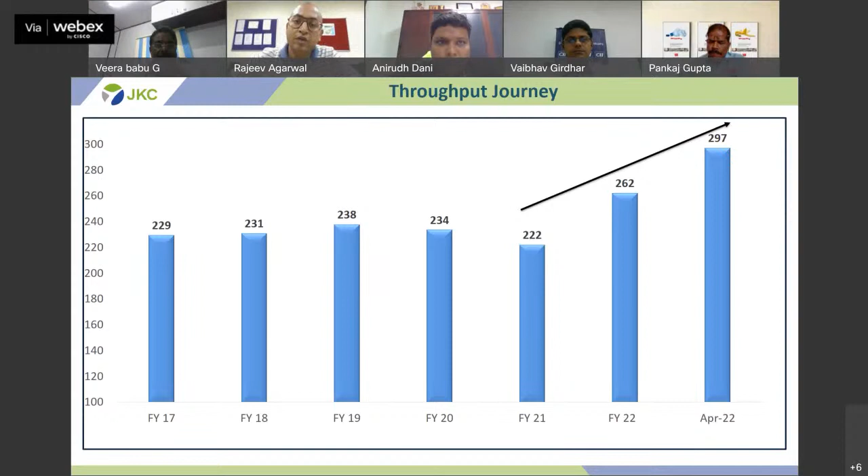If we see our throughput journey, we have continuously improved it, and for achieving this parameter we have done lots of modifications and many projects, which we will discuss in the coming slides. We have also taken many energy initiatives, and some of the major energy saving projects are shown here.

We replaced the ball mill shell liners, optimized grinding media, installed an energy efficient oil-free compressor, and energy efficient AC. Previously we had conventional liners, replaced by specific thin, T-shaped liners, giving us a benefit of 1.42 kWh per metric ton specific power. This helped us optimize our media pattern. In 2019-20 we were at 23% media loading, and now we are at 16.5% media loading only, giving benefit in specific power.

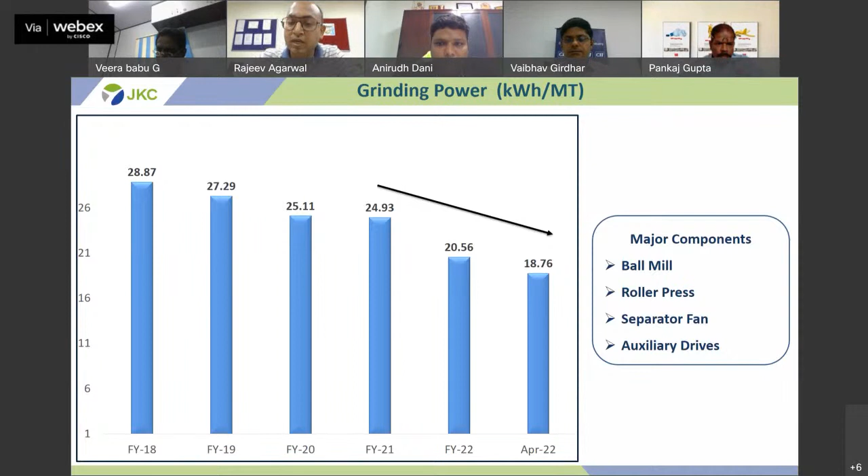This is our grinding power trend, we can see the journey from 28 to 18.76. Our major components for grinding power are ball mill, roller press, separator fan, and auxiliary drives. In ball mill we reduced power from 10.32 to 6, in RP from 8.85 to 7.57, in separator fan from 3.87 to 2.39, and auxiliary power is also reduced to 2.43.

For ball mill we did the shell liner modification already discussed. For roller press, we replaced the rollers and regularly optimize the gaps for better grinding and reducing power. In the separator fan, we studied the gas volume and reduced false air to get this power benefit. In auxiliary power, we have also done many projects, replacing old drives by VFD drives in bag filter fans etc.

So if we see the CII benchmark, we are on top in RP plus ball mill circuit. Also, if we compare from VRM, then we are at only 18.76 specific power. Almost equal. Yes, sir.

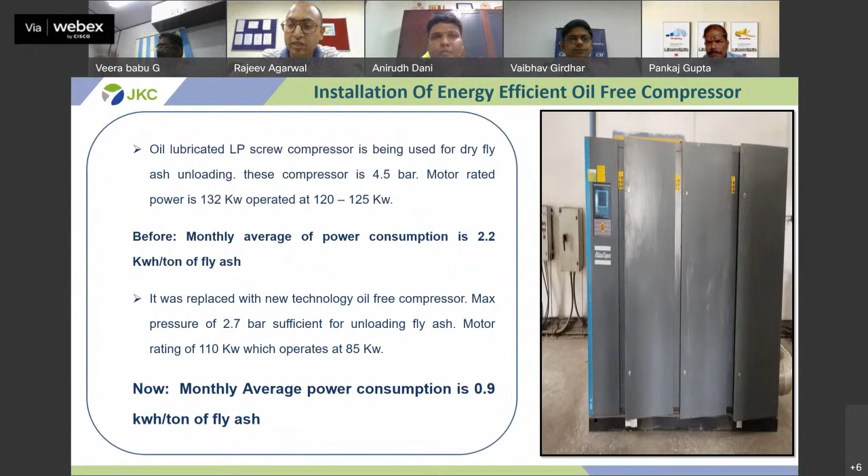Sir, other than this, we have installed energy efficient oil free compressors in our plant. Previously we were using the conventional LP compressor, with motor rating of 132 kilowatt, operating on 120 to 125 kilowatt, which consumed 2.2 kWh per ton of fly ash for unloading. Now we have replaced it with new technology, oil free compressor, with maximum pressure up to only 2.7 bar and motor capacity of 110 kilowatt. This now consumes 0.9 kWh per ton of fly ash, and this project gives us benefits in compressor power.

So we have also done a lot in AC power. We replaced our conventional ACs with BLDC ACs. The main advantage is that it consumes only 800 watts for a 1.5 ton AC, against conventional AC which consumes around 1730 watts. BLDC AC uses permanent magnets, while conventional AC uses conventional electromagnets. So due to less heat generation and less maintenance, this gives us benefit in power.

So if we talk about energy saving projects, from 2017 to 22 we have done 42 major projects, with total saving of 98.78 lakh kWh, and total saving in rupees of 684 lakh. These projects consist of installation of 14 numbers of VFDs in bag filter fans across the plant, 100% LED lighting in plant, and occupancy sensors in offices and lobbies. All this lighting is controlled from CCR, so the timer will turn on and off automatically during morning and evening. Further, we are planning to install weather sensors in the lighting to automate this.

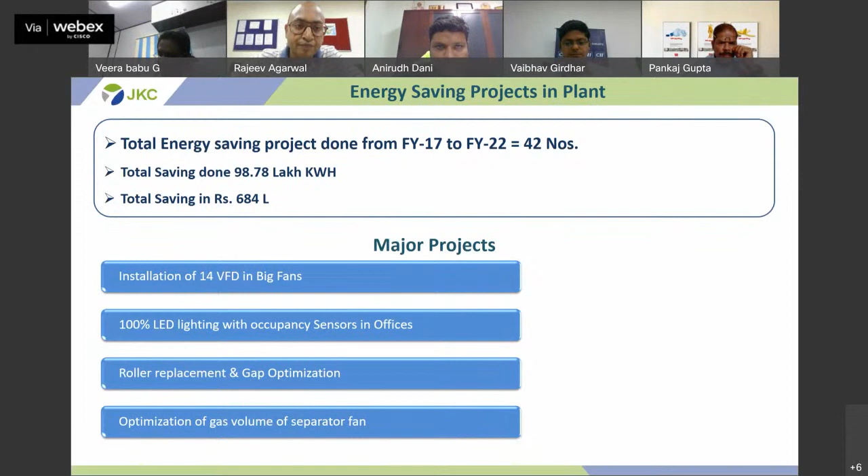Sir, as well as grinding, we are working on other sections also. If we see packing plant power consumption, we were at 1.55 kWh per ton in 2017, and now we are at 0.73 kWh per ton. For this we installed VFDs in packing plant, reduced pressure setting of packer from 6.5 to 4.5, and one major project is RFID implementation. RFID is an automatic logistic and packing management system. This project will help us reduce the specific power of the packing plant.

So compressor power. Compressor is also one of the major components in the grinding unit for power. We were at 1.11 in 2019, and now we are at 0.73 kWh per ton of cement. For this, we optimized the loading and unloading pressure of the compressor, installed a P&V system in the compressor house, replaced the compressed air cleaning system with a body cleaning blower on site, and arrested leakages and false air through regular audits.

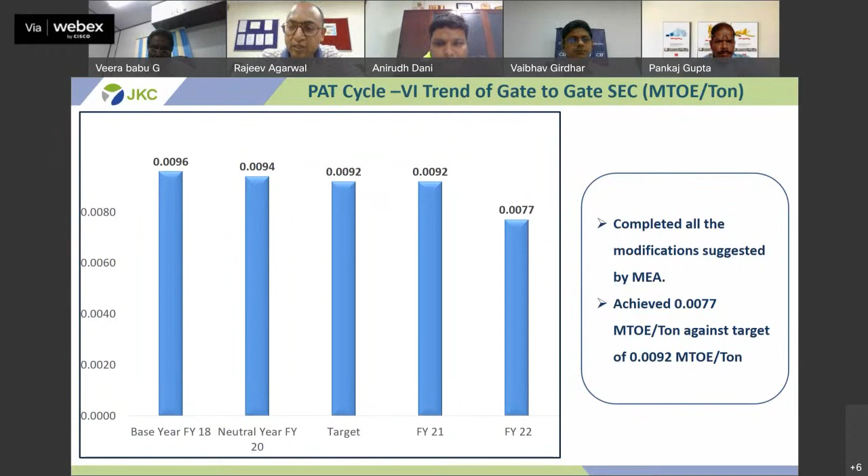So if we see our PAT cycle 6 trend, our target was 0.0092 MTOE per ton, and against this we are achieving 0.0077 MTOE per ton, which is much less than our given target. In this, we already conducted the MEA project, the mandatory energy audit, and these are some ongoing projects of the mandatory energy audit. Some of these are already completed, and we are working on the other projects also. Thank you, sir, that's all from our side.

Thank you, thank you, Rajeev and Amrut team. This is from the industry side. It's a difficult phase running the plant given the conditions and locations, but I really thank you Rajeev, you've done a good job, great job Amrut. It's going good ahead in JK. Thanks once again for your presentation. It will give energy to all participants to also decrease their power consumption, especially from ACs, which consume power unknowingly. Done a good job, thank you, thank you.